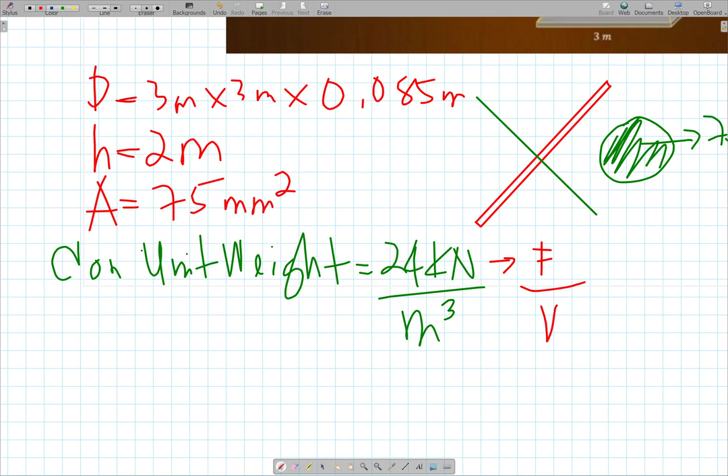24 kilonewton refers to force or sometimes weight. Cubic meter, that is volume. So, given, the concrete unit weight is equal to 24 kilonewton per cubic meter.

Alright, so the question, number 1: Calculate the tensile force in each of the cables in kilonewton. So, how many cables are there? There are 4 cables, right? 1, 2, 3, and 4. But what he wants, class, is to calculate the tensile force in each cable.

So for each cable, what is its tensile force? Let me repeat, calculate the tensile force in each of the cables. There are 4 cables, right? Since they are symmetrical, the tensile force is the same in each cable. If it's 5 here, it's also 5 there, 5.

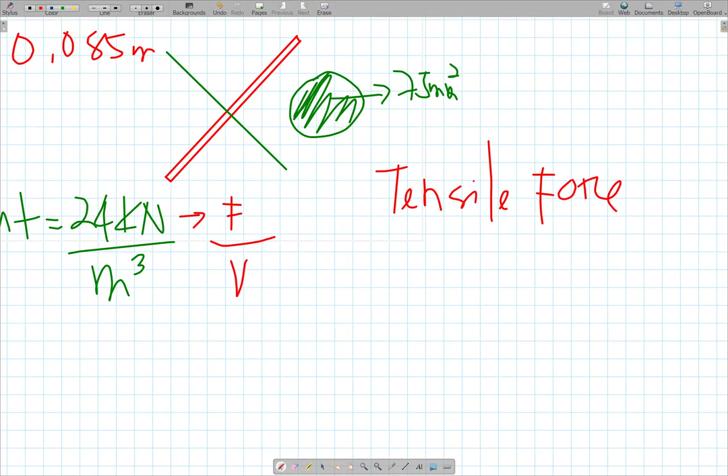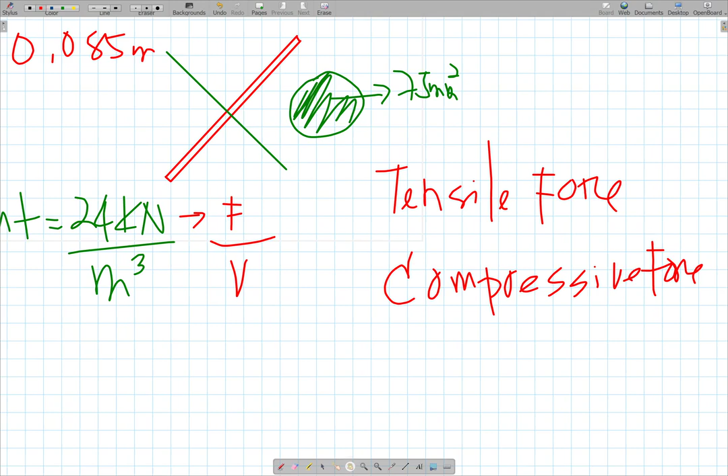If, let's say, these are our members. If it's like this, the meaning of tensile force is this direction. And this one too. So this is the direction for tensile force. The compressive force, class, has this direction. This one too is compressive force and compressive force. So that's its direction.

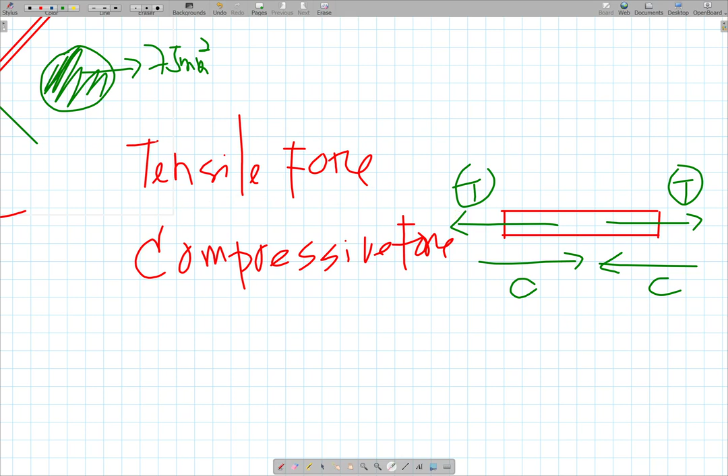So this is common sense too, I suppose. Alright. In a generic term, tensile force and compressive force, that is actually axial force. So those two are actually axial force.

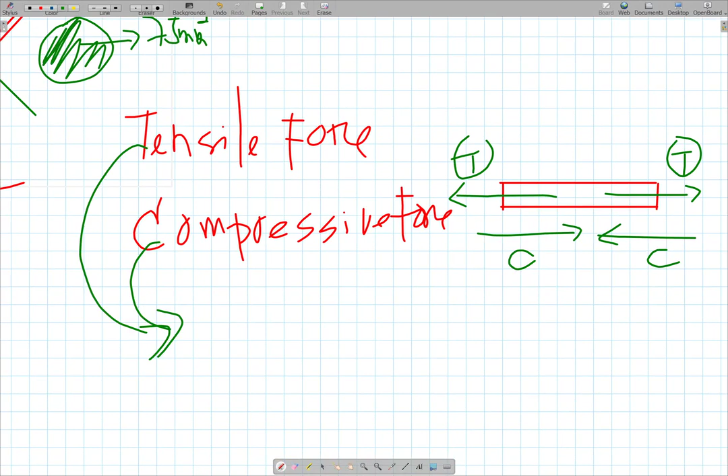Okay, where is that? Here, right? These two, in common terms, tensile force and compressive force, that is actually axial force. Where can we see, class, the axial force? This is the compressive and tensile force. The axial force, class, is parallel to the member. Parallel. Compression, parallel. I mean, tension, parallel too. Tensile force is parallel, and compressive force is also parallel to the member.

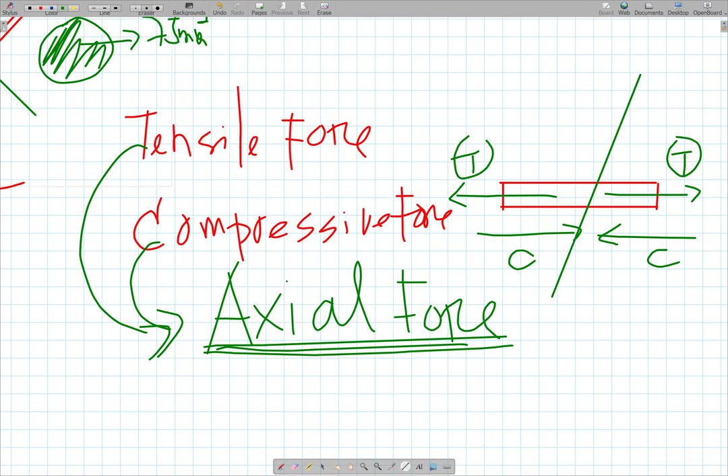Okay, so if we cut this, class, assuming we cut it, and let's say it's rectangular, the cross section will look like this, let's say a rectangular beam.

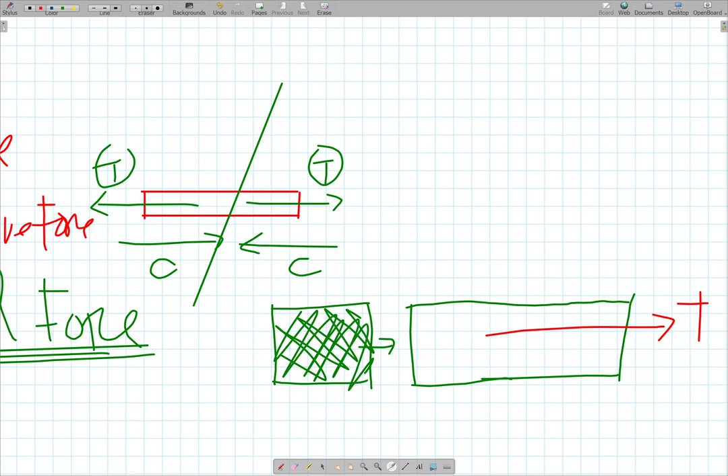Follow? So, at the cross section, your axial force is perpendicular, whether it's tensile force or compressive force, it's perpendicular to the cross section. Along the whole span of the beam, class, our axial force is parallel. Follow? So basically, that's what tensile force, compressive force, and axial force mean. Actually, axial force is a tensile force or a compressive force.

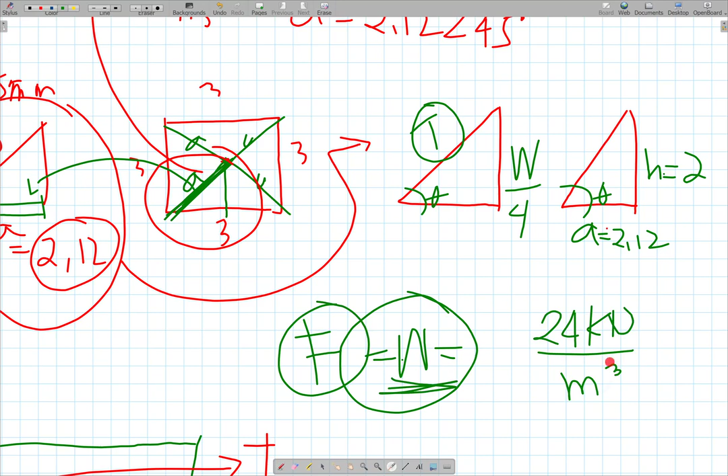Okay, so ang W class is just the same as your force. Para makakuha tayo ng W dito sa unit weight, you have to eliminate cubic meter, yung volume. Para mawala yan, class, kasi ang kailangan natin dito is the weight. The unit of the weight is kilonewton, or sometimes force. Actually ang weight sa force pareho lang, ang weight lang kasi ang direction niya papunta sa baba.

Okay, so in finding weight class, given ang unit weight, alam mo na ang unit ng force at saka ang weight must be in kilonewton only. We have to remove cubic meter. So para ma-remove yan, anong gagawin natin? Multiply it by cubic meter, di ba, so that you can cancel out. Yan ang parang technique para magamit natin ang mga given. Divided by cubic meter o times mo. Volume ng ano ito, class?

Volume ng precast slab natin, which is 3 by 3 by 0.085 meter. Lagay na natin dito: 3 by 3 by 0.085, naka-meter na cubic, no? So we can cancel out cubic meter.

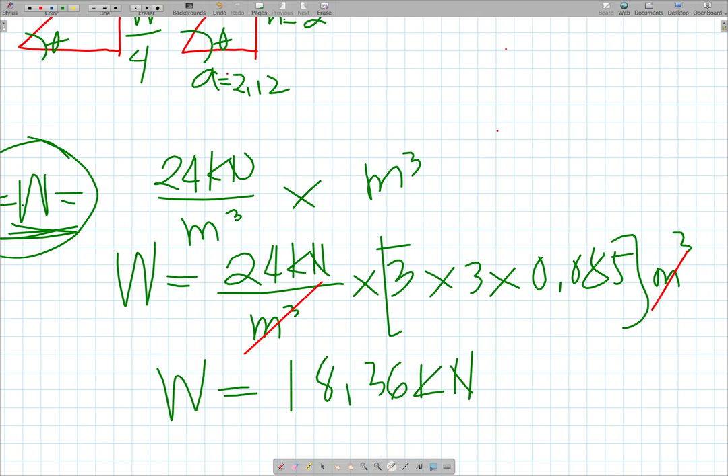So our weight, this is actually weight na siya, class. Weight is equals to: 24 by 3 by 3 by 0.085, equals how much? 18.36. So yung weight natin is 18.36 kilonewton. Since ang kailangan natin, class, is over 4.

Over 4, no? So yan ang kailangan natin. Kasi isang cable lang ang ginawa natin, kasi symmetrical, the same lang, so isang cable lang kukunin natin. So this must be 18.36 kilonewton over 4. How much?

Alright, diretso. Okay, answer, yung 18 kanina, over 4, kasi apat ang cable, kaya over 4 siya. So the answer is 4.59 kada cable, 4.59 kilonewton.

Follow, so 4.59, class, ang kinakarga ng kada cable natin. So apat man yun, kaya yung 18.36 divide tayo into 4. Kasi ang ginawa natin, kinuha lang natin yung isang cable, so we have to divide that one into 4. So the answer is 4.59 kilonewton.

Yan na yung weight, ilagay natin siya dito, class. So meron na tayong W over 4, which is 4.59. Yung drawing na to, lagay natin dito, draw ulit tayo ng panibagong triangle para klaro. Which is, this one is 4.59 kilonewton, and this is your T, which is yun ang papanap sa atin.

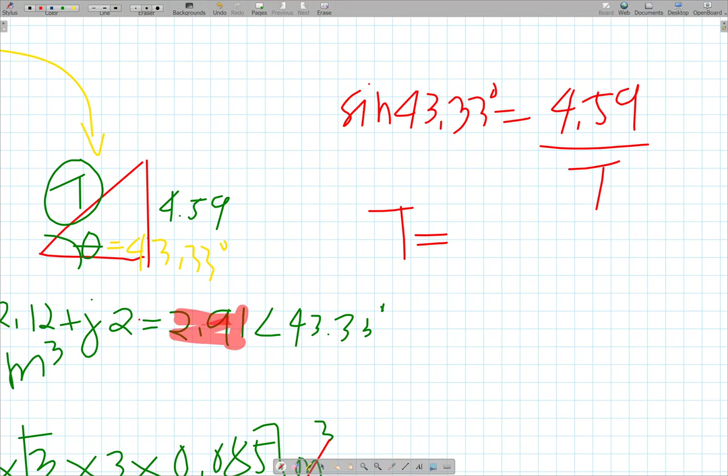Alright. So this is where? Saan na? Alright. This is 4.59 divided by sine 43.33, and then equals 6.689. Okay, picture kasi mahina na, ayaw na mag-memorize. 6.689. And so your tensile force is equal to 6.689 kilonewton. Can you follow? So yan na yung pinapanap sa atin sa number 1.

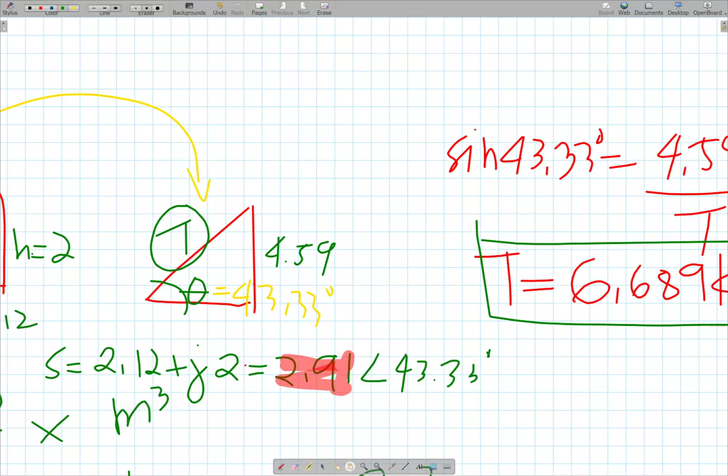Okay? So the tensile force in each cable is equal to 6.689 kilonewton. Clear? Okay, so fully clear, no? Before you can proceed to question B, ayan, dapat kasi alam natin yung strategy, no? Lagyan mo ng step, class. During your study, lagyan mo ng step. Anyway, pwede mo naman i-review ang video, unlimited din naman. Okay, so second question. Ano yung answer? Letter A, no?

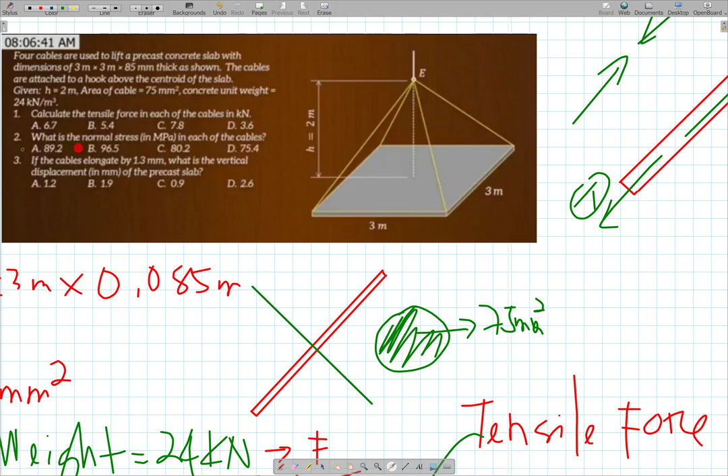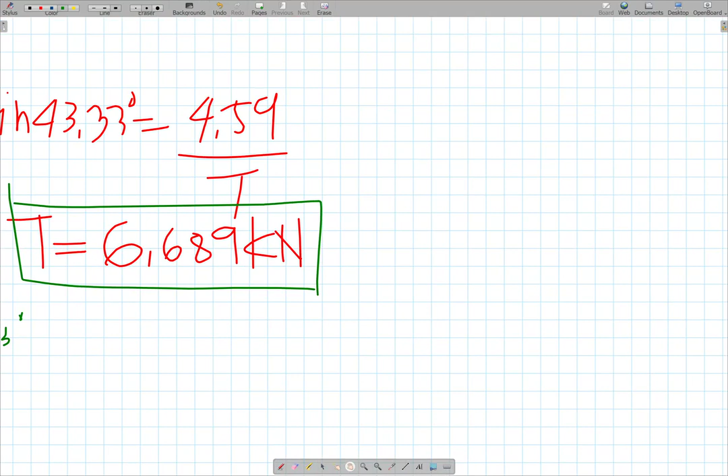Next question is, what is the normal stress in MPa in each of the cable? So, since symmetrical, pareho lang ang stress dito. Cable yan, they are the same kasi they are symmetrical. What is the normal stress in MPa? So dito tayo normal stress. Ang tanong sa letter B is normal stress.

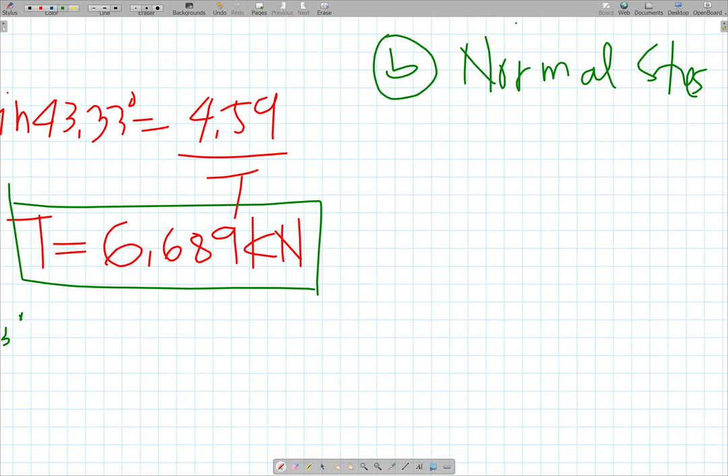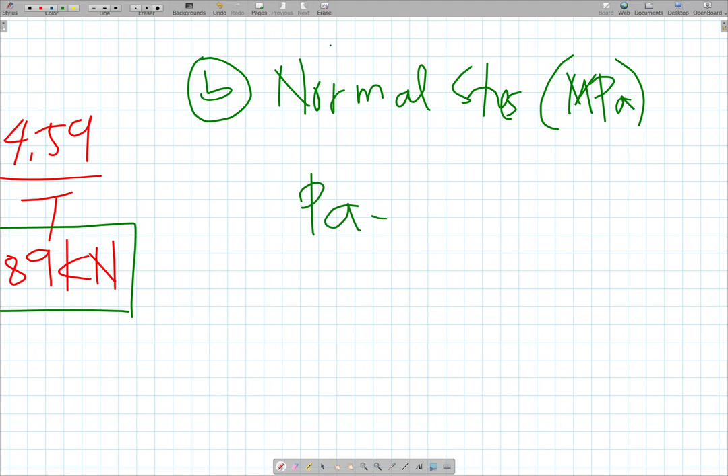Okay, so ano ang normal stress? How will you define normal stress? In MPa daw. Ano ibig sabihin ng MPa? Megapascal. Ang mega lang naman yan, times 10 to the power of 6. So ano ibig sabihin ng Pascal? Pascal is Newton per square meter. Yung N mo referring to force, yung square meter referring to area.

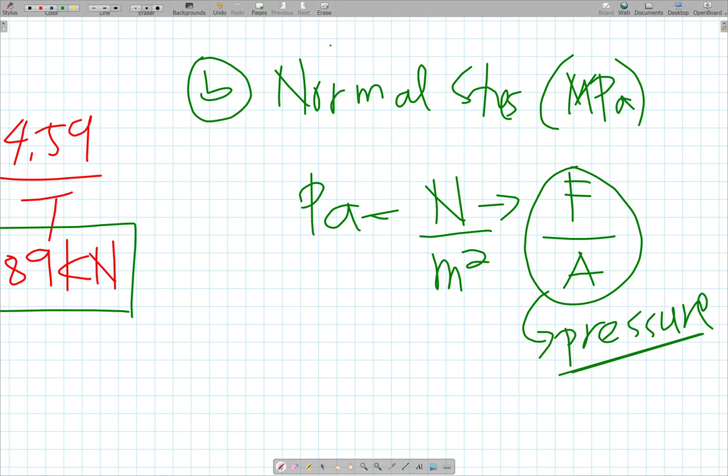We can also call this one, class, as pressure, di ba? Force over area, that is still pressure. So parang ang normal stress, class, pressure yan. Dalawa man yan, normal stress and shear stress. Dito tayo sa normal stress. Ano ang formula ng stress? Normal, tangential. Stress is equal to force over area.

We have to find the normal stress in megapascal. Ang mega, that is times 10 to the power of 6. Ang pascal, that is Newton per square meter, or force over the area. Since ang tanong, class, is normal stress, ano ang force gagamitin natin dito? Walang problema sa area, class. That is the cross-sectional area of the cable.

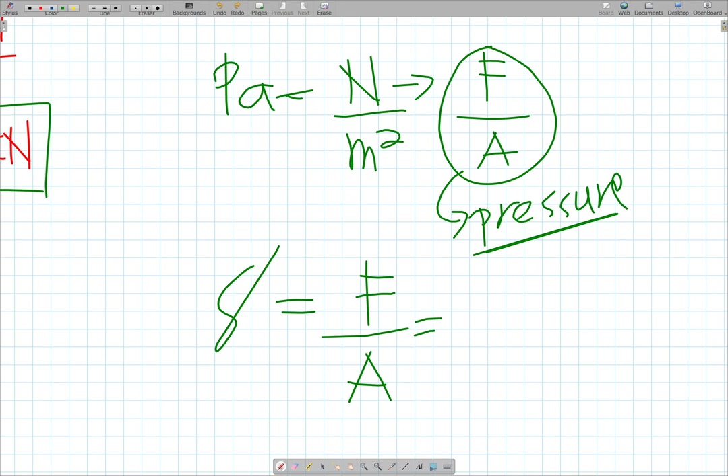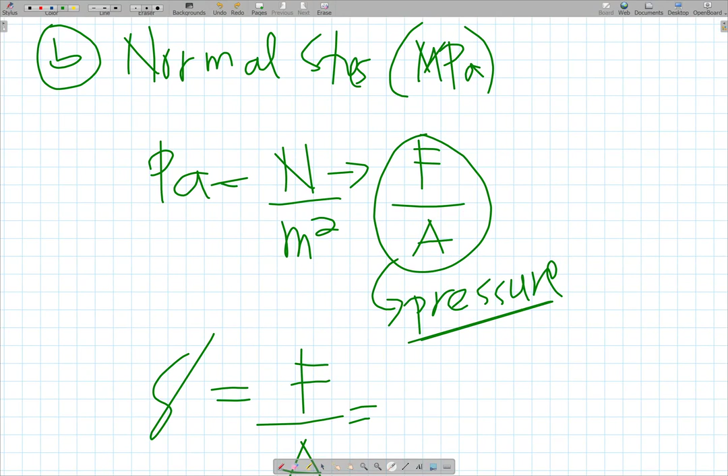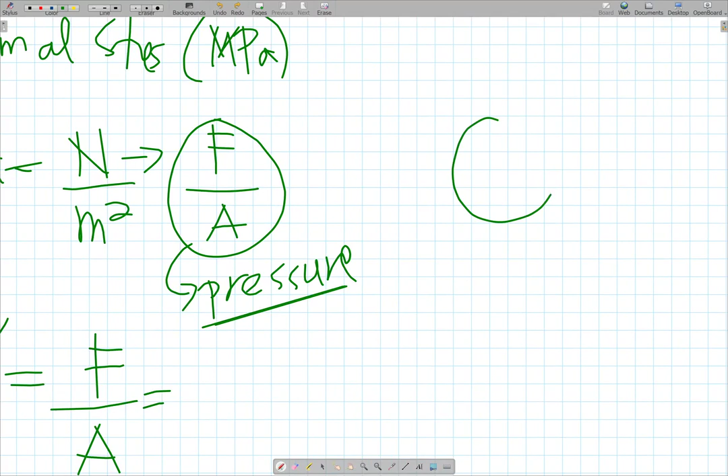Kasi ang tanong sa letter B is calculate the normal stress in each of the cable in megapascal. Ang pascal, Newton per square meter. Ang Newton referring to the force, square meter referring to the area, the cross-sectional area of the cable. So mag-draw muna tayo ng cable para makita natin saan ang normal stress. That is the cross-sectional area. Pag hiwain natin ang cable, sa cross-section, ganito siya.

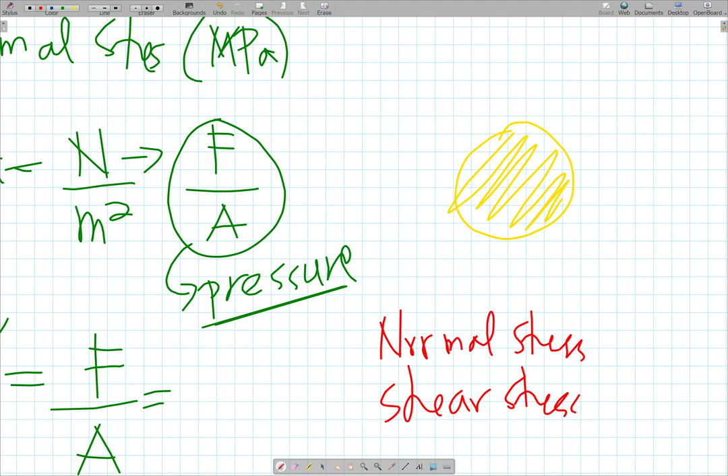Ang normal stress, class, at saka shear stress, pareho lang. Ang normal stress is force over area, di ba? Pati shear stress, pareho lang ang kanyang equation, which is equal to force over area. Diba? Ayan.

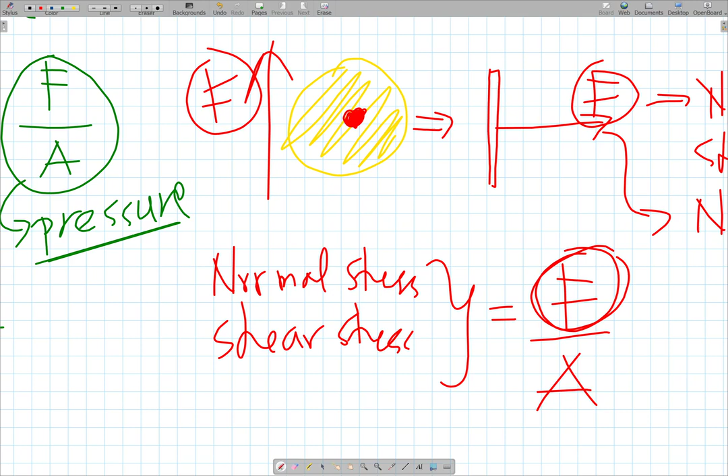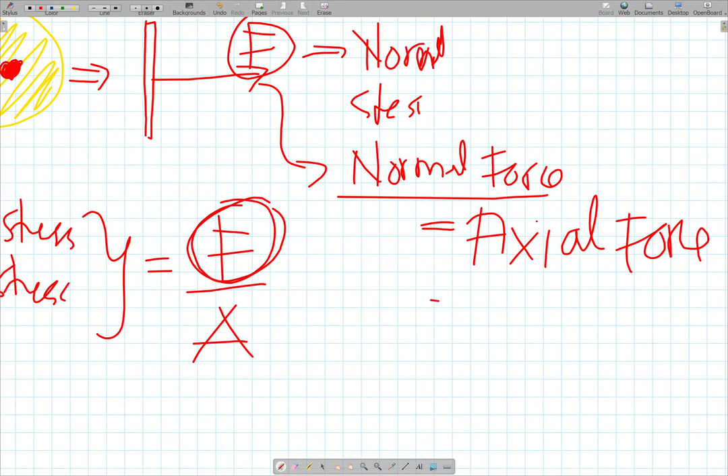Since he wants normal stress, it must be what? It must be perpendicular to the cross-sectional area of the cable, which is now referring to axial force. You follow? Or what is it? Compression or tension, of course. Tension. Tensile force. You follow? So, what we'll use to solve normal stress is axial force.

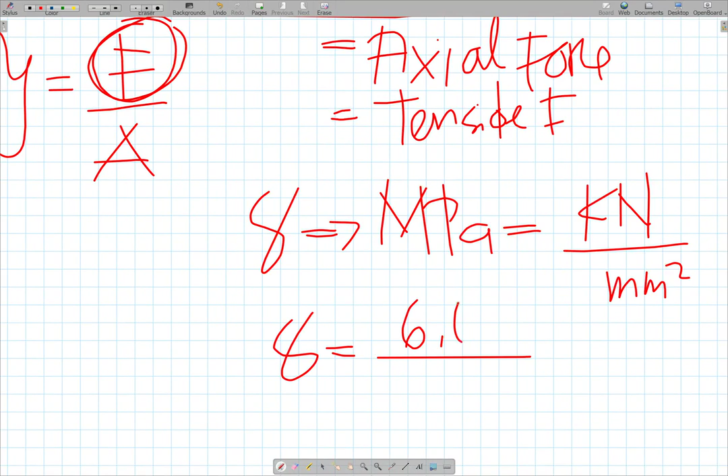6.689 over 75 mm square. Oh, sorry. Alright. How much? 0.0892 megapascal. Is that right? So, 0.0892 megapascal. So, this is the normal stress he wants us to find.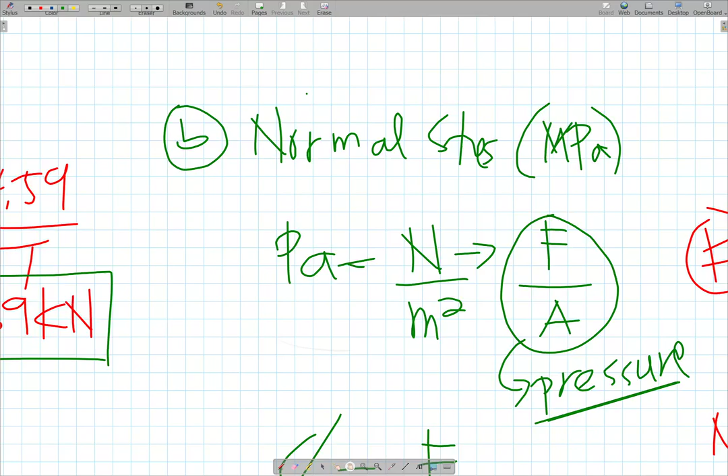Alright. Okay, what is the normal stress in MPa? 6.89. Let me check. Sorry class, let's just check the units. Okay. It's in kilo, so it should be 6.689 exponent 3 over what? Over 75 mm². The answer is 89.19.

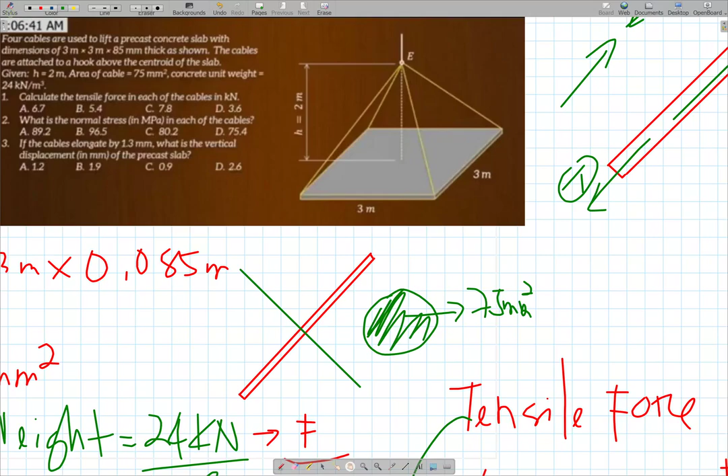Sorry. Alright, where is it? Okay. This. 89.19, so this is wrong. Already in megapascal. Alright? Wrong. Alright, so this one class must be 6.689 times 10 to the power of 3, over 75 mm², that is equal to 89.19 megapascal. That is the normal stress of the cable. Okay, right? So, clear?

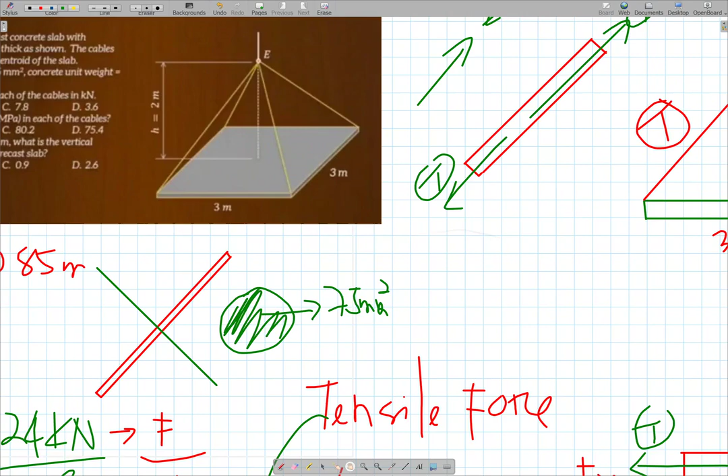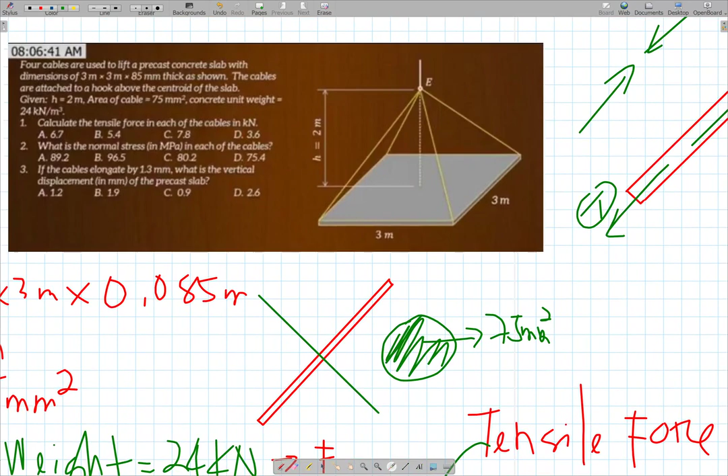We proceed to the last question. Where is the last question? So 89. Okay, letter A. Then the last question for this situation. If the cable is elongated, so maybe let's do it on the other side. Here. Okay, this works.

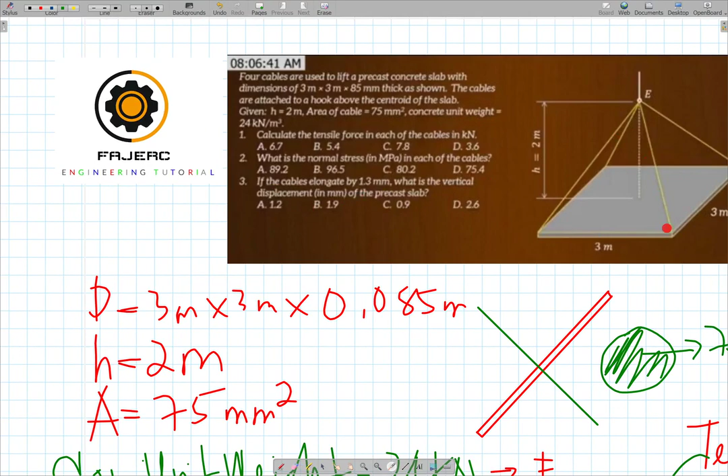Okay. The last question class: if the cable is elongated by 1.3 mm, what is the vertical displacement in mm of the precast slab? So, assuming class, let's take this view as the front view. So, it will look like this. Sorry, let's draw the slab first. Like a front view. Slab, okay. And then, right.

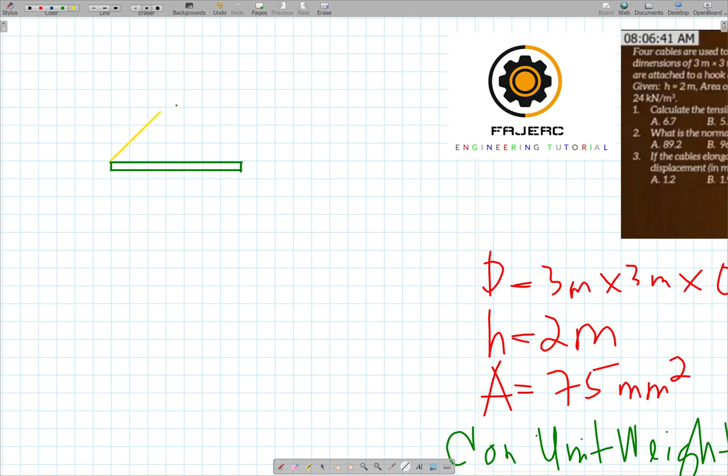Okay, so assuming nandito ang cable, yellow color, yan. Okay, alright, so yan, no? Ang tanong sa number 3 is, if the cable is elongated by 1.3 mm, what is the vertical displacement in mm of the precast slab?

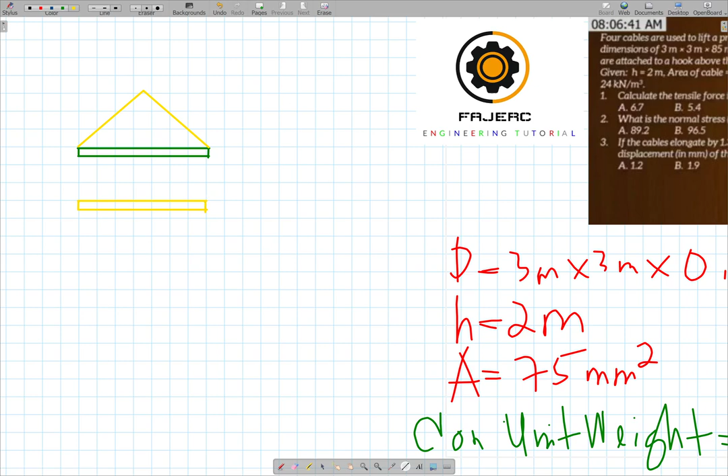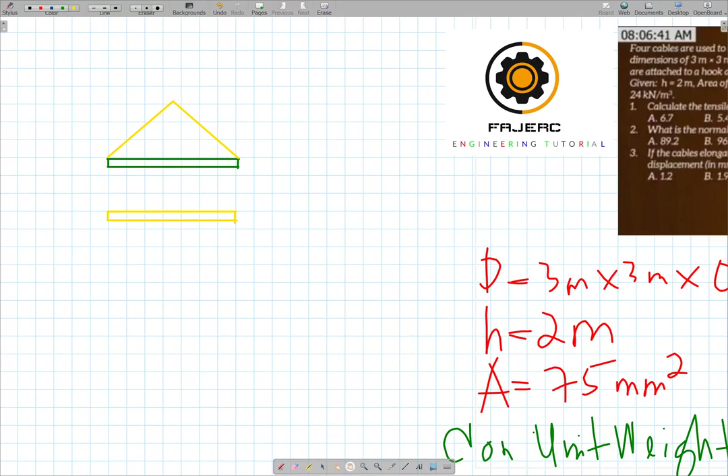Since may sinabi dito, if the cable is elongated by 1.3 mm, what is the vertical displacement? So, ito na class, ang vertical displacement na sinasabi niya. Dito, di ba? We will denote that one as D. And then it will elongate by 1.3 mm. So, visual class, mag-elongate yan, dapat naka 90 degree lang yan. May 90 degree na nangyari dito.

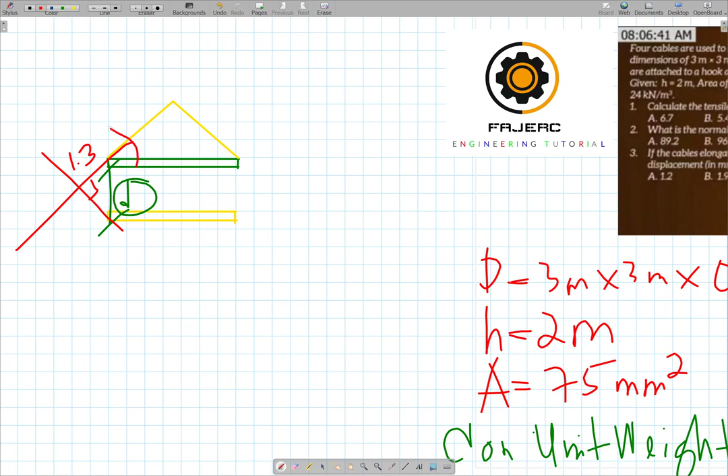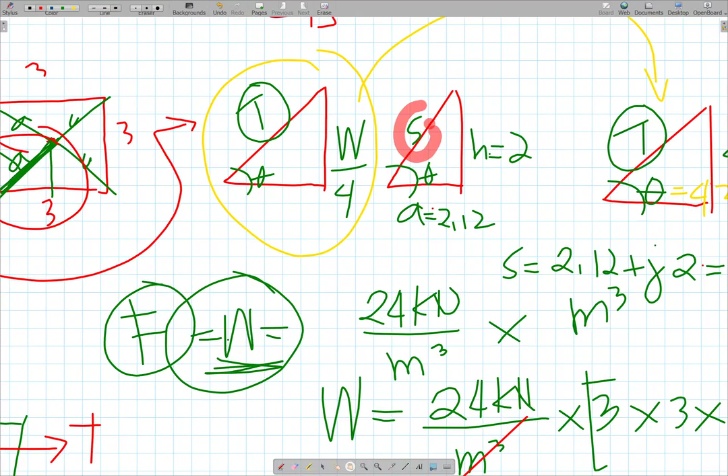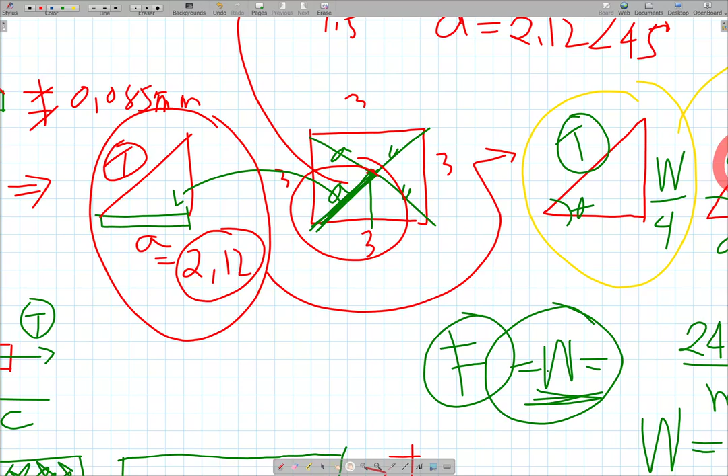This will be your 1.3 mm elongation. Then we are solving for the vertical displacement. Okay? So, madali na lang. Kung meron ka angle dito, yun na yun. So, yung angle dito is the same as this one. How much is this one? That is equals to 43.33. Pareho lang, no? So, ang angle dito is 43.33.

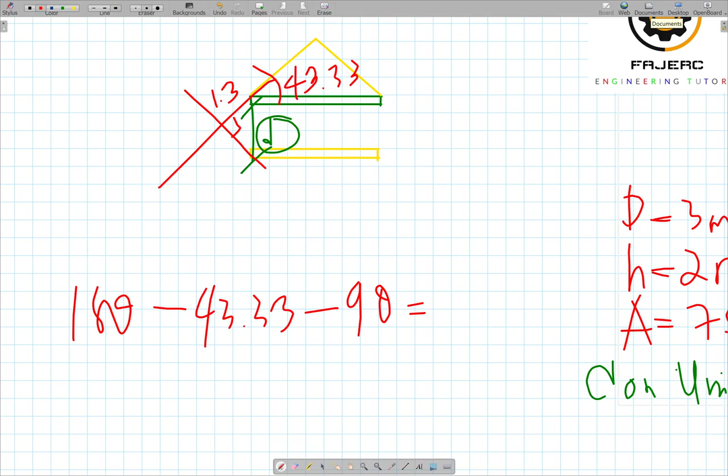Kung gusto mo imano-mano pa siya, you have to consider this one as 180. Tanggalan mo siya ng 43, tanggalan mo din siya ng 90. 180 minus 43.33 minus 90 is 46.67. Ang angle dito is 46.67. Pero hindi yan ang kailangan ko. Just subtract it again from 90: 90 minus 46.67, the same pa rin siya, 43.33. So the angle we need to solve the displacement D is just the same with this angle.

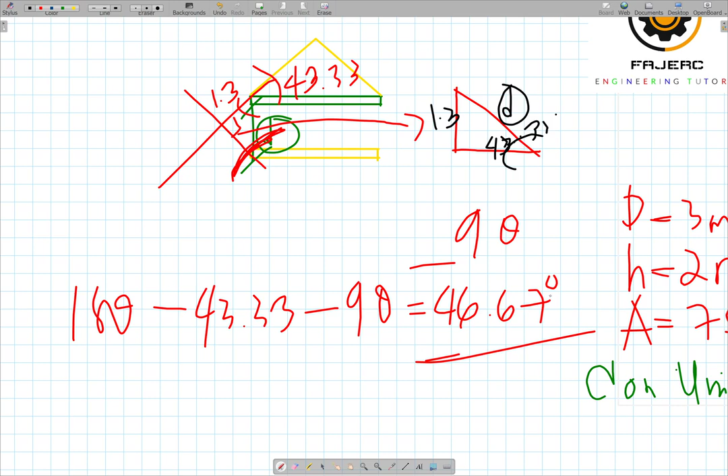Okay, so i-isolate ko, no? Ito ang figure. Ito na ang D. Ito na yung 1.3. Ito na ang 43.33 degrees. So, how will you solve for the displacement D? We just use SOHCAHTOA. We will use sine, of course. Sine 43.33 degrees is equals to displacement D over 1.3 elongation.

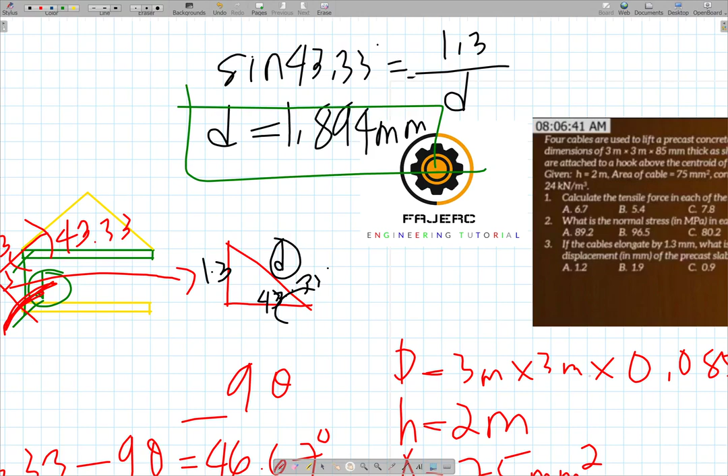So your D is equals to, calculator. What? 1 point... Tama na ba? Mali, sorry. Baliktad. So, SOHCAHTOA, sine is opposite over hypotenuse. What is your opposite? 1.3, and then the displacement D. So, displacement D is equals to 1.3 over sine 43.33. Set your calculator in degrees. Equals 1.894 mm. So your D is 1.894 mm. That is this vertical displacement. 1.894, so 1.9, letter B.

So if the cable is elongated by 1.3 mm, what is the vertical displacement in mm of the precast slab? So the vertical displacement is 1.9 millimeters.